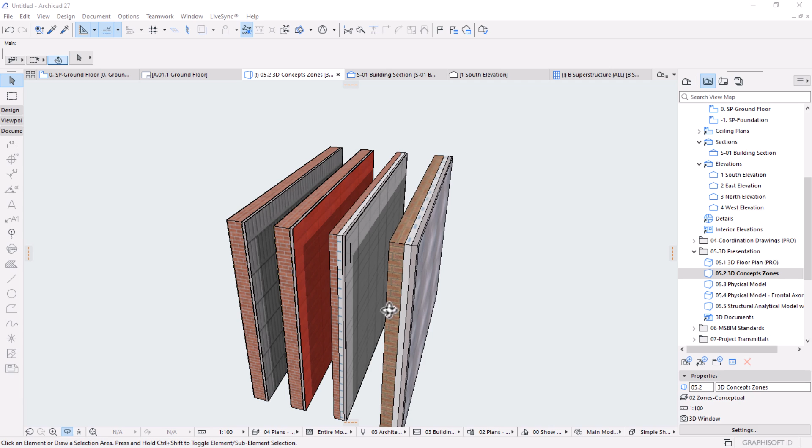Hello my friends, my name is Dominic, and in this video let's explore the philosophy of ArchiCAD and its methodologies. This will not only help us understand the inner workings of ArchiCAD but also uncover intricacies that we might have missed during our self-teaching efforts, propelling our designs to new heights.

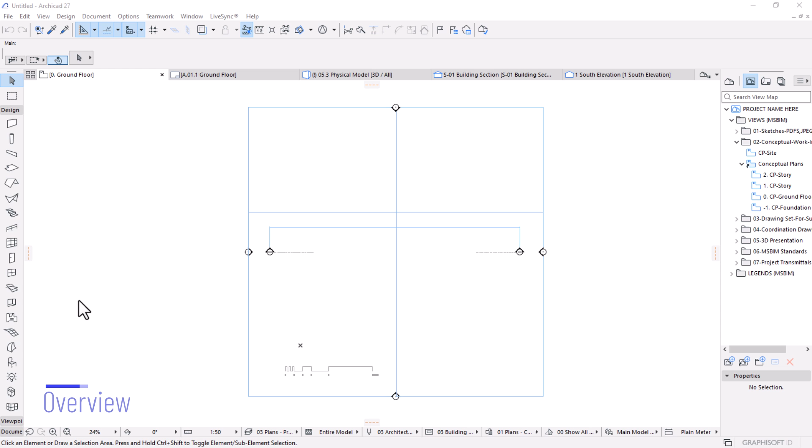My friends, to get started with this video, I want us to understand the BIM-centric approach of ArchiCAD. It means it's been built on a BIM platform. BIM means, I'm sure you know, building information modeling, which means it focuses on creating a digital or a visual representation of a building. And this comes in the form of physical and functional characteristics of a building.

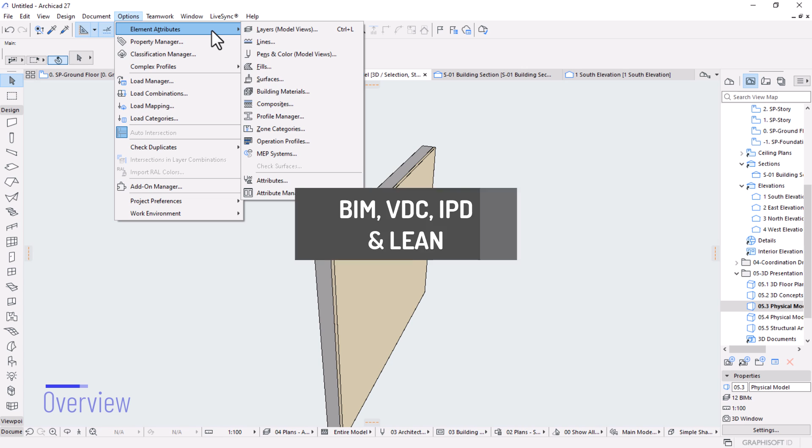So there are different methods or systems that ArchiCAD supports. Not only BIM, we have VDC, which is Virtual Design and Construction, IPD, Integrated Project Delivery, and also we have Lean as a system. We'll delve deep into this system on the webinar because we cannot cover them all in this video.

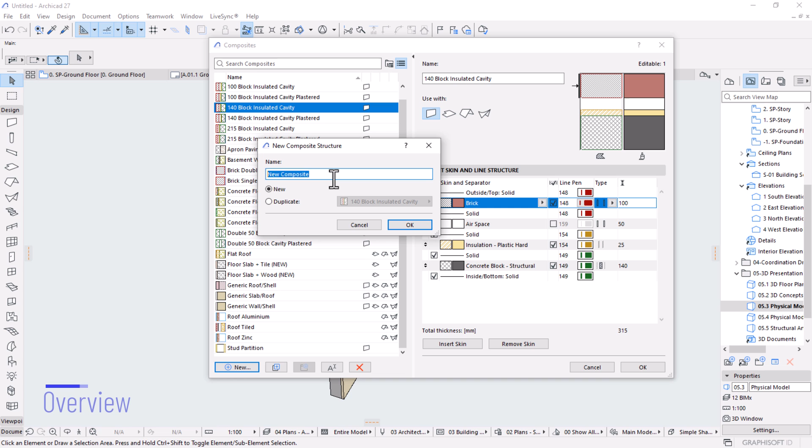But I want us to focus only on a specific aspect, which is the information side of it, because all the systems use information to better inform the project. So I want us to cover that aspect, the use of data and parameters to better inform our project.

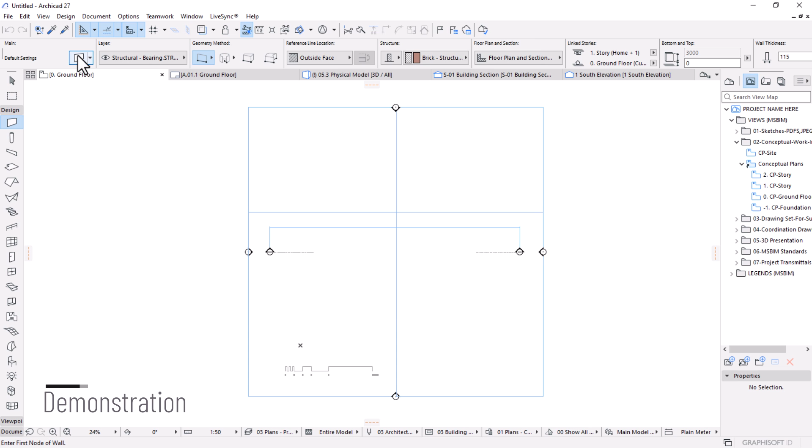So we have also the settings dialog where you can expand this and access more information in a broader perspective. So let me just stretch this so that we can fit all this information inside here, and then it's been divided into sections, right? We have the first section, which is geometry and positioning.

Obviously it determines the position of your wall, but it's determined by linking your element to the stories. For example, currently the home story, with the offset from 0, is linked to the ground floor, and you can also start it from the foundation floor depending on your design requirement. Okay, and then it's linked again at the top to the floor above.

That's why we have top link, which is story number 1, the upper floor from ground floor. Here it will calculate the height of the stories, the height between the two stories from ground to story 1, which is 3 meters. That also will determine the height of your wall, for example.

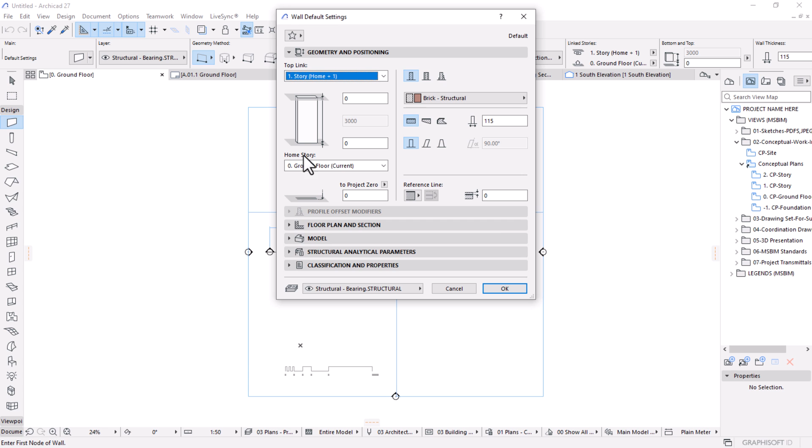But if you go back to your story settings and adjust the height of your stories, you can say Control 7 to access the story settings, or we have to cancel this first. You can say Control 7, or right click on one of the stories here on the view map, then go to story settings. Shortcut is Control plus 7 on your keyboard. If you're using Mac, it's Command instead of Control.

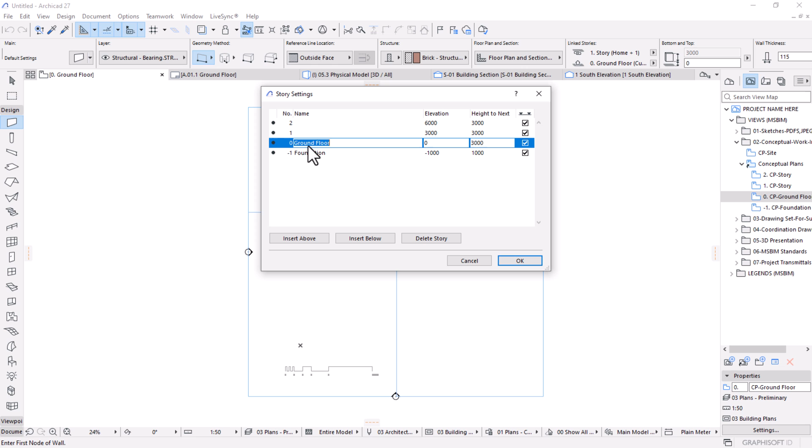So let's change the height of ground to story 1, maybe say 4 meters. If we change it and hit OK, and go back to the settings of this wall, you would see now the height of the wall is being changed, or it now addresses what's the height of the two floors, which is great. It's just basic information that can inform your project better.

And then we also have this part where we can use a basic or a composition of materials or a profile. But as you know, these walls are a composition of materials. Most of the elements in your virtual building will be a composition of materials. If it's concrete, you have to have a series of different materials that bind together that slab, for example. If it's a roof, you also have different materials that assemble the entire roof. So it's just like that in ArchiCAD.

But normally we can use just the basic for maybe conceptual work or sketches. But if you want your visual model to represent an actual building, you have to do things right. So our wall is going to be keyed on a composition, and then we're going to create a composition.

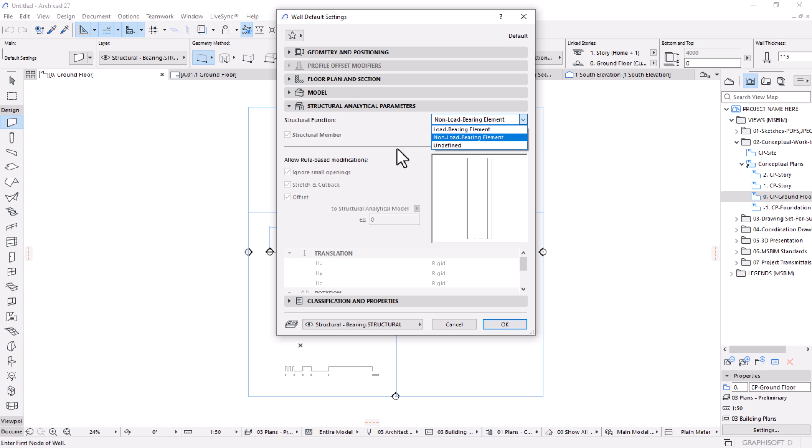We also have another important section, the structural analytical parameters, where you give meaning to this element. Is it non-load bearing or load bearing? The structural functionality of this. In this case, I would say it's a load bearing element. Then you can also check what exactly this element is - it's a wall. In terms of structural membership, there are three types: plate, wall, and shell, according to the ArchiCAD concept or philosophy.

So let's just key in wall, and you can see here we have 'allow rule-based modification.' So we want to check all the boxes to ignore some small openings and stretches and cutbacks. Okay, so down below is the translation of that information we just assigned there.

Another important section is classification and properties. If you click on it, you would see we have tons of data about the wall. Some of this information comes in as placeholders - it's just parameters for you to key in information, or you can even customize them.

But I want us to look at classification. Let's hover your mouse here and stretch this a little bit. Classification is very important because it's the system we use to tag or assign information and manage how that information is used for every element in ArchiCAD. Every element you place that becomes part of your virtual building has to have a class or classification system.

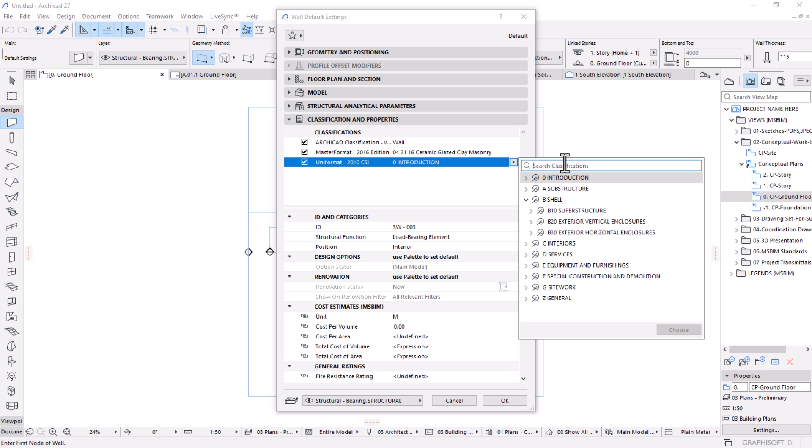What is it? What exactly is this in relation to the building components? I would say this is under shell superstructure. I'll just search here on the search bar, say a wall. It will give all the different types of walls: exterior wall construction, exterior wall supplementary components.

But what do I need to do here? Exterior wall - I think I will go for fabricated exterior wall assemblies, because what I'm trying to do here is come up with a different material composition, so I think it's the appropriate specification for that.

And then from here I would say... actually, let me just leave it the way it is. There's a lot of information that can end up confusing you, but you can just keep it simple and choose the exterior wall, just like that.

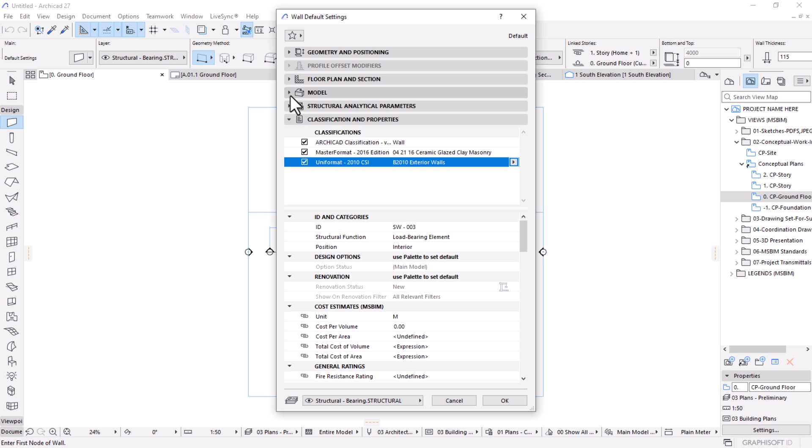And then we have the model parameters, which is the surfaces. I don't like to use this one because I'm overriding the materials that are supposed to be represented appropriately, so I'll just hit OK.

I'll come back to this one. I can just get rid of it for now and hit OK. So let's just place the wall here. I'll draw this wall to here - pick the first point, and then I can key in the length of the wall, say 5 meters.

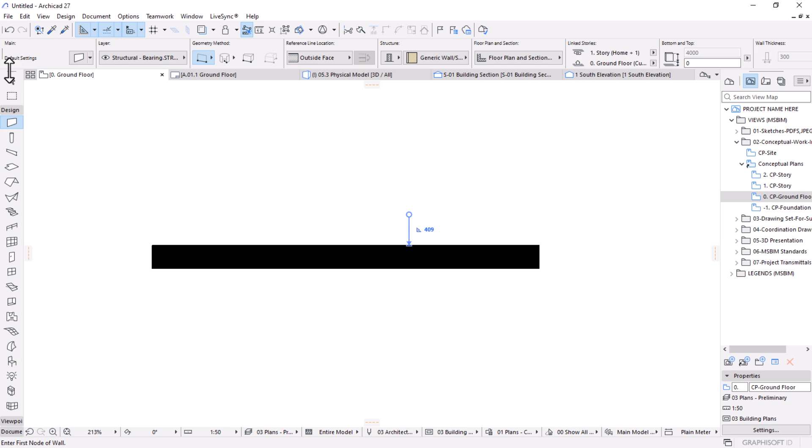Right, so I'm in a different view for conceptual plans - that's why my wall looks solid like this, but I want to expose this. You can get rid of the graphic override combination, or choose a different, appropriate view for this. Perfect, we have that. We can come here and say no override, but it's basically the same thing.

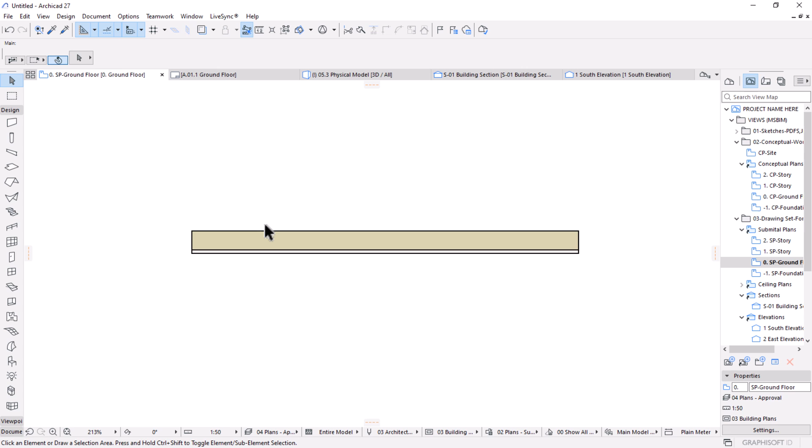So we have this kind of wall - it has two skins or two layers of materials. We have this gray one, and then this one. So let's see how we can leverage this section and create a series of materials to assemble our element, which is a wall.

The first thing to do is load - I have a library I want to load for the materials or surfaces I'm going to use, because ArchiCAD does not offer everything. Some of the information has to come from suppliers, because these materials come from someone else, isn't it? Someone has to manufacture this information, these materials. You as an architect or designer choose from the suppliers or manufacturers, so most of the time we're depending on the information they provide about the product or material.

So let's go to File, then Libraries and Objects, Library Manager. I'm going to load my custom surfaces that I've downloaded from the internet. So I'm going to just load - but before you do that, I'll cancel this. Before we do that, let me introduce you to one of the sites here.

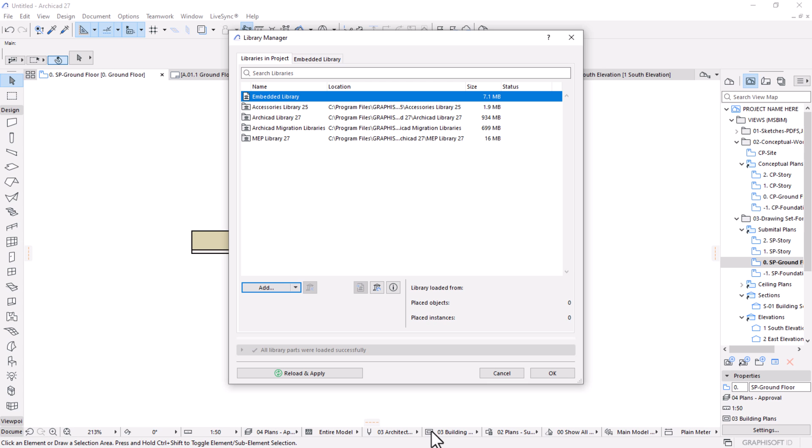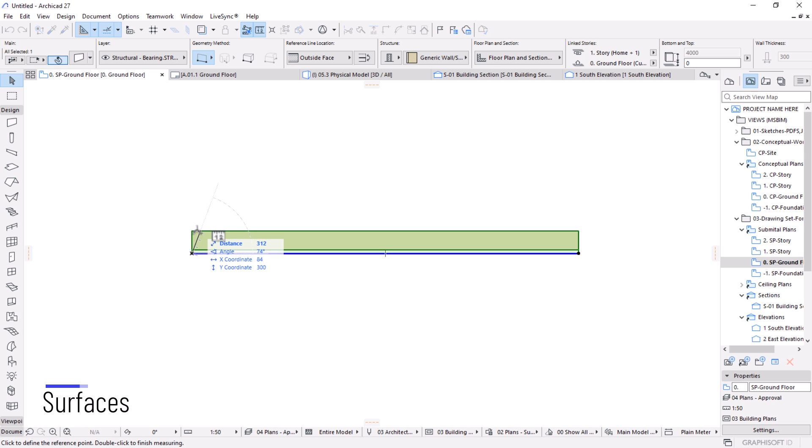So for example, we can calculate the number of bricks for our wall we just placed here, which is this wall. Let me cancel. So I know the length is 5 meters, and the width is 3 meters, the thickness is 3 meters. If you go back there and key in that information, the length is 5, the height is 3 meters.

Okay, let's go back. I've downloaded one of these materials that we're going to use in our demonstration. Let's go back again to File, Libraries and Objects, Library Manager, to load our library that I just downloaded from the internet. So it's going to be in downloads.

This is the library, I'll open it, and then perfect, it's here, it's loaded, and I can just say OK to embed it, or link it, into my ArchiCAD.

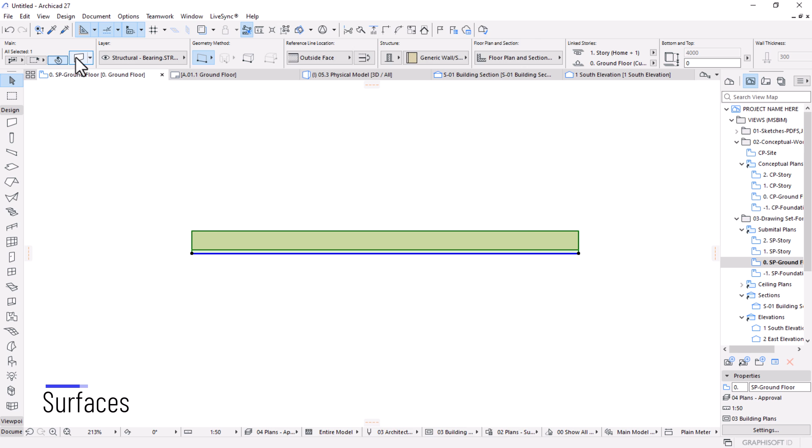So it will take a bit to load, and from here let's see where the library has been assembled. If you come here and open... no, not this. What you want is to access that information and see how we can use it on this wall. For example, if I go to F5 and put this wall in 3D.

This is just, there's no representation whatsoever of a physical or actual element, right? What we said, these methodologies and systems, which is BIM, VDC, IPD to Lean, represent the actual physical and functional properties of an actual element within your virtual model.

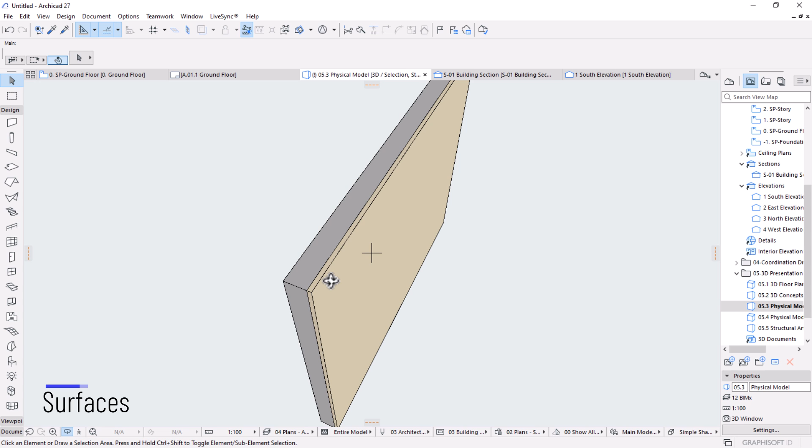So let's see how we can make this, sorry about that. Okay, so the first thing to do is to look at different aspects that assemble the information within your element.

I'm going to start with the surface. We're going to look at surfaces, building materials, and composites, and see how this works hand in hand. That's how ArchiCAD functions - they use these element attributes. They are called element attributes because they are the ones that glue everything together.

Your physical and graphical representation of your element is based on these attributes - your fills, surfaces, building materials, and composite. You come here under composite and it glues everything together, from your lines, your pens, we bring everything together by using a composite. We'll see that in a minute.

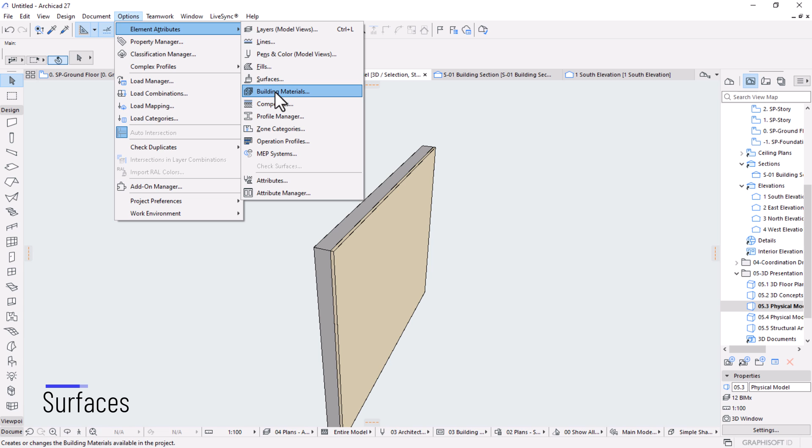So let's start by creating a surface first for our walls. I'll go to surfaces, because we need to create a material. In order for you to have a material in ArchiCAD, you have to create surfaces first. By default we have this in our template - you can see it's nicely arranged and formatted well. What you need to do is go down below here and say, new.

Let's say new, and because I'm going to create a series of materials here, I want them to be in the same section, so I'd better use a code that I'd know is for this. Let's just say ACM, or say BIM, for example - I'd say BIM, then hit OK. I'd like to give it a name according to the texture name, so for now I'll just hit OK as running bond, that one, which is this material.

We can come later and readjust that information. So let's go back down here under texture, and then we replace this texture by clicking on this button for browse image, and that's where our library comes in. So if you scroll up, you'd see there are linked libraries here. So we have our ACM textures there. Let's open that and then find our brick that we got from our manufacturer, and then hit OK.

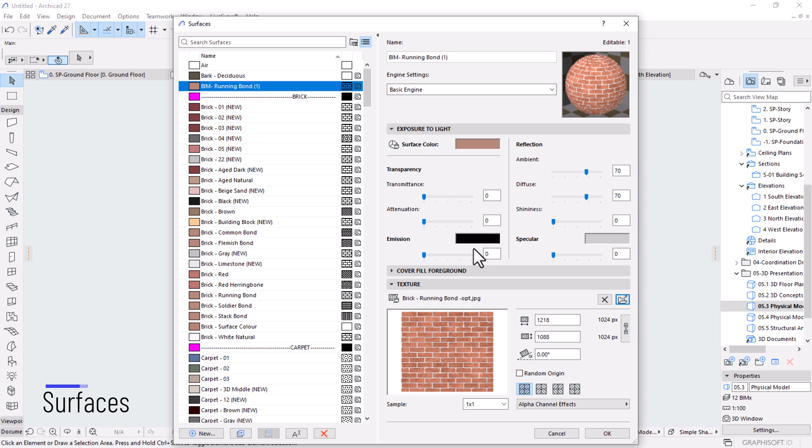All right, I would like to link original proportion, okay, so that we can have it nicely like that. I think we can leave it at this measurement. Okay, now I can come back because it says Sapphire Satin. That's the name of the brick. I'll say Sapphire Satin. Right, this will be face brick. Okay, and then the surface color should be relatively close to what we see here.

All right, once we're done, let's create another material again, and then say BIM. This one also, just hit OK. We're duplicating it because we want to reuse the same system, which is BIM. I want to group them here so that I don't have issues of navigating when I'm trying to assign it. So this one also I'll just do that.

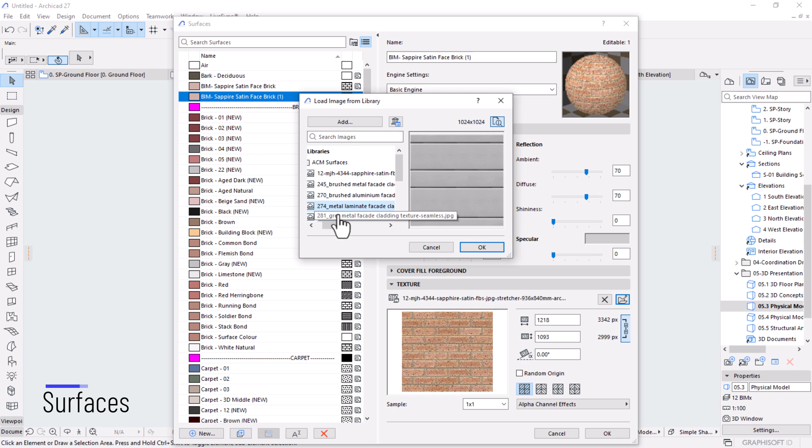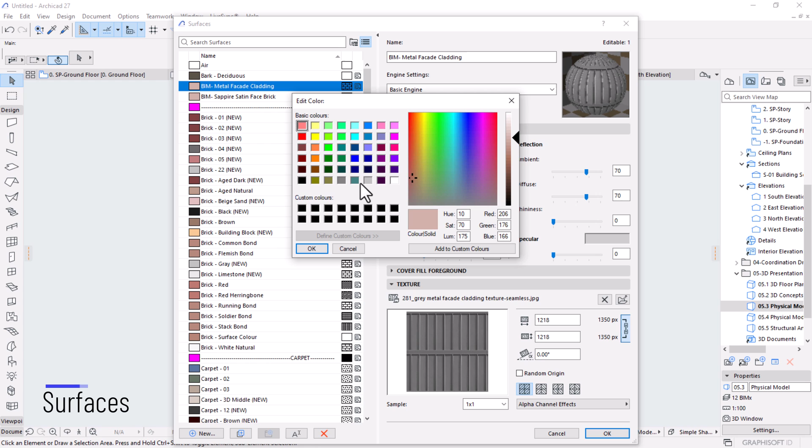For this I have different types of aluminum panels here. I'll start with this one and then take the name, rename it there. This is called gray metal facade cladding. I'll just say metal facade cladding. Then I'll link the proportion as well, and then set the color to resemble what we see, or the texture, which is that. Okay, let's go back again under new and create another material.

So let's go back here, browse. I'm going to go for this one. Hit OK. Make sure you link the proportion right. Then the name is metal industrial cladding. Let's just say industrial cladding. Yes, we have the fourth material that we need to create as well.

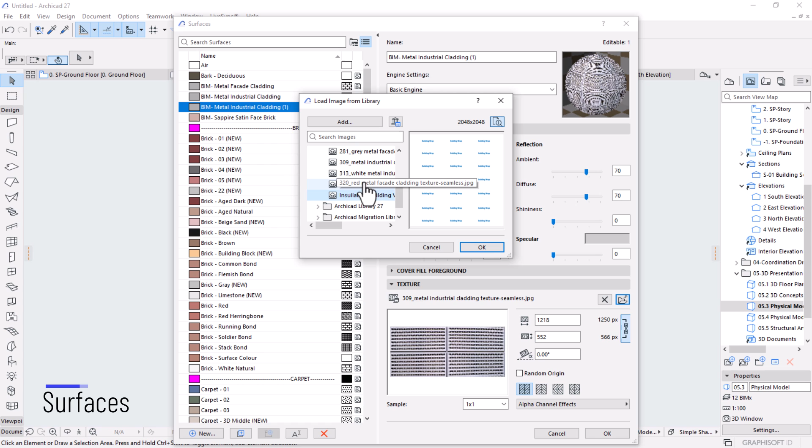Browse. This one I'm looking for. What is this? I'm looking for the insulation, but we'll come and create an insulation material after. Let's go with this one. Its name is the red metal facade. I'll just say red metal facade because it says the name already exists.

Okay, and then we have an insulation material, because these materials, if you join them together, you're gonna have to have a form of insulation within your element. So I'll create a texture for the insulation as well. Browse, I have it somewhere there, which is this one. The name is insulation building wrap. Insulation building wrap. Okay, I think everything is fine.

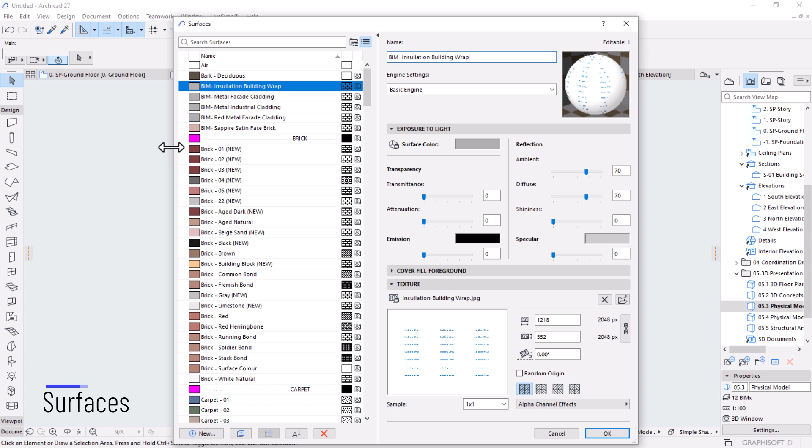I think I forgot to change the colors for this one. It's supposed to be orange like that. Okay, for this one it's fine. Industrial, maybe we can reduce the intensity a little bit. For cladding it's gray, that one is fine. For this, let's make it white. Make it white. Okay, so now we have the color of the material, its class, whatever, and then the name of the material.

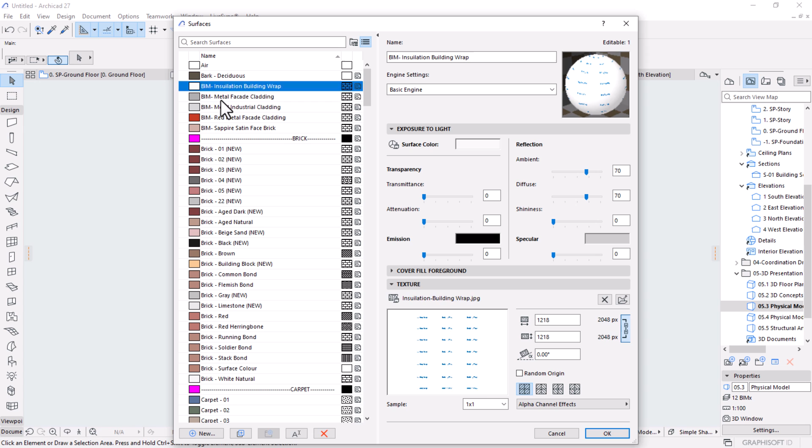Okay, so also make sure this is locked. All the materials have to be locked. Even this one, lock. Yes, I'm pretty happy now with all of these materials that we created. Let's see how we can bring this material together now. I'll hit OK, and then we'll go back again under element attributes from options menu, and then we want to open the building material section. So here again we're going to create a material now.

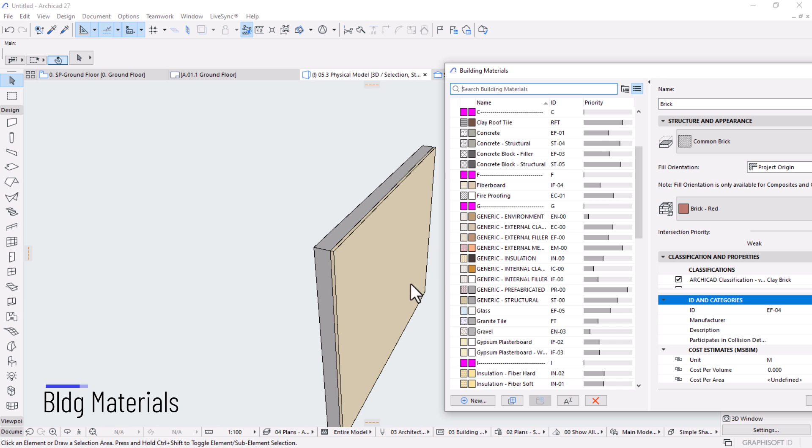So remember, these two layers represent what's in this list. I don't know, am I making sense? We have two skins here, or two layers of material. We have this more like a plaster, and then we have the core, which is the core brick or core wall, which is this gray thing. These are the only two materials used for this element. They were extracted from here, or they were created based on here.

So to see where these materials are located, let's just cancel, and then if you select it, you go to options, element attributes, and then open again building materials. You'd see where the materials are located, because ArchiCAD will highlight those materials. We have this generic structural material, which is this gray, and then we can find another material. Where is it? Yeah, I think it's this one, generic cladding. Yes, it's the one. You can see the color as well.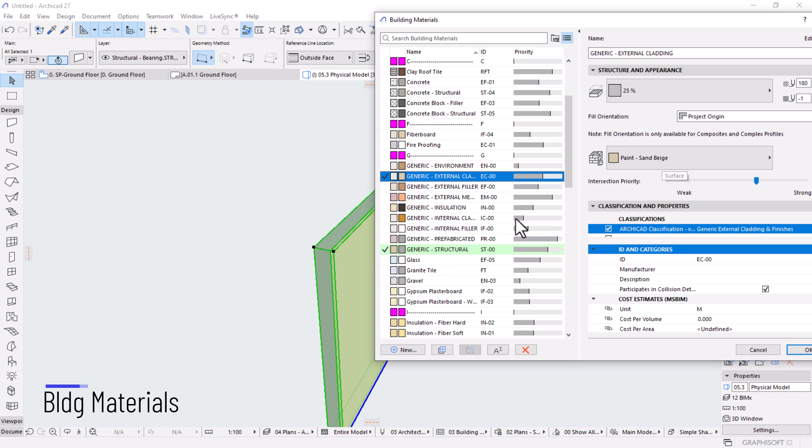So that's basically that. So we need to bring our materials here for the surfaces we created. Remember, let's say new to create one, and then I'm gonna also group them here by the abbreviation of BIM, and then the material will be, we're gonna start with the bricks. Okay, I forgot the name of that brick.

Okay, I said sapphire satin. Oh, sorry about that, I didn't see. Sapphire double P, sapphire satin. So even naming of the material, guys, really counts, because that is the information that you can also extract and share. It's very important to see how you name your materials.

What's this? Sapphire brick. Let's say, I'll just say clay brick. Okay, and then hit okay. That's the material we just created. Well, we'll have to define the structure and appearance, and then we have classifications here down below. Then we have properties of this material.

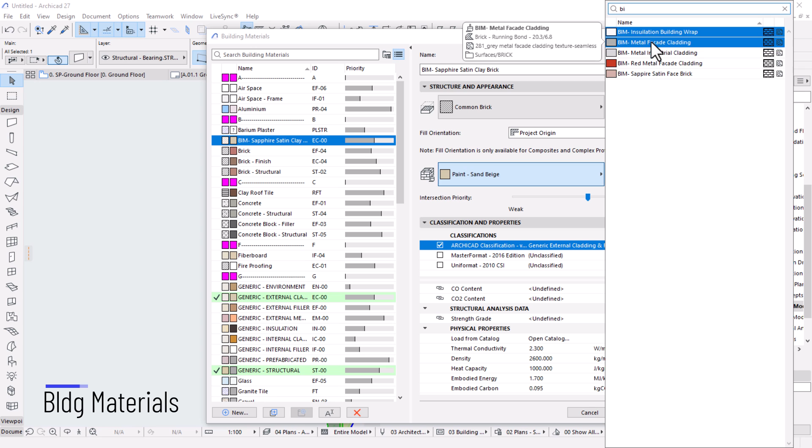And then I also need to define the color of the hatch, which is going to be 13101, right? That will be the color of this hatch. Okay, so the strength, I can reference the strength of this material because it's important, because ArchiCAD uses what you call intersection priority to connect the elements. So when a wall meets a wall, there has to be a smooth connection.

And when, for example, a load bearing wall meets a partition wall, a dry wall, it has to be communicated very well. So that communication comes from how weak or strong the material is. Okay, so for example, I need to benchmark on this brick and see its strength is 540. So I think mine also around 600 is fine.

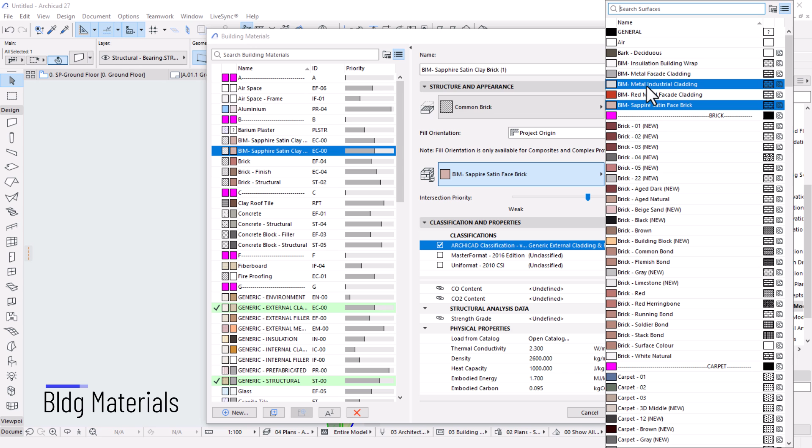Okay, so from here I can create another material as well. For now I don't know the exact name. So what I do, I can come here and then bring the name first, which is the red metal, and rename it the red metal facade. Yeah, this is a red metal facade cladding.

And then because this is a different material, it's not a wall, it's a metal, right? So what I need to do is to change the hatch to represent metal. If we have metal, I think we have aluminum, right? There we go, as a fill, and then the surface is fine like that.

Go back again, and let's create another material as well, which is going to be industrial cladding. I'm just gonna say industrial cladding, then get rid of this one, and then that. So also this is another material, which is for metal, but I need to confirm the strength of metal. Let's just find a metal, we have aluminum. I think 311 is

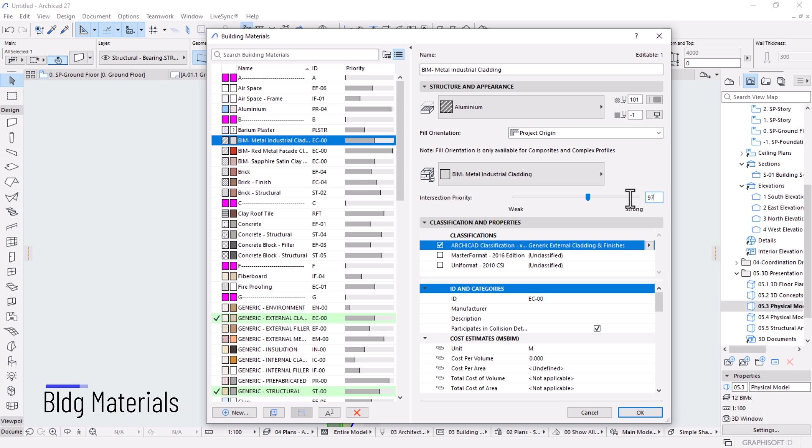Let's create another one because we have a couple of materials there. Let's load metal facade, then give it a name, facade. Get rid of one. It's the same cut fill. Then I can go back, create another material, which is the last one, the insulation. Insulation building wrap.

All right. Okay, for the insulation, let's also confirm the strength, 410. They're basically 410. So I'm gonna just do the same for my insulation material. Okay, so we have all our materials created here.

So we need to go back. Let's hit OK to complete that, and then from here, if you go again to Element Attributes from your Options, and then open now Composites. Let's see how we bring all those materials together now into an element.

Okay, let's say composite. Then from here, what we need to understand is that we have a list of composites. This is an already available composition of materials that comes with ArchiCAD, and you can see all these are specific to the tool they're going to be used with. You have your wall element, slab element, roof element, and shell element. So what we are going to do here is create a composition of these materials for a wall element. That's what you should bear in mind.

Okay, so I'm going to say new here to create, and you see each and every composition here has a different list of materials assigned or arranged in an order based on how it's going to affect or impact the construction of the element. So I'll hit on new, then I can duplicate this to take advantage of the existing listing, or just create new completely. I'll say new composite.

We're gonna start with one of the metal facade claddings. Okay, so I'm gonna use the BIM prefix, for the sake of you guys understanding and referencing across all the attributes how we've been creating this. So I'll say BIM, and then this is going to be the naming. Like I said, it's very important.

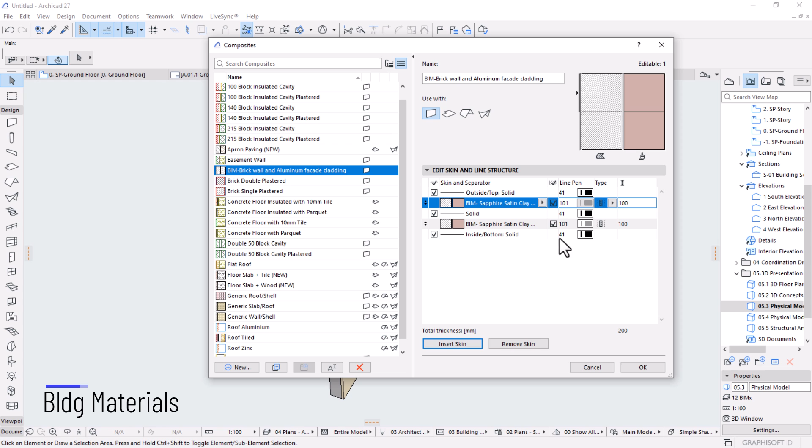Right, then we're going to insert another skin, another material. Let's insert. This one is going to be our insulation. Where is our insulation? Building wrap. And then also set the pens. For the insulation, I'm going to go with 0.13, and the hatch should be 101. I think the hatch is fine at this.

And then we also have the thicknesses of these materials. According to the specification of my supplier, 106 is the thickness of one brick. So if you make it 2, it's going to be around 250. Let's make it 250 to accommodate plaster, or just say 220. Okay. You see now it changes the preview here. And the wrap, that insulation, let's make it 80.

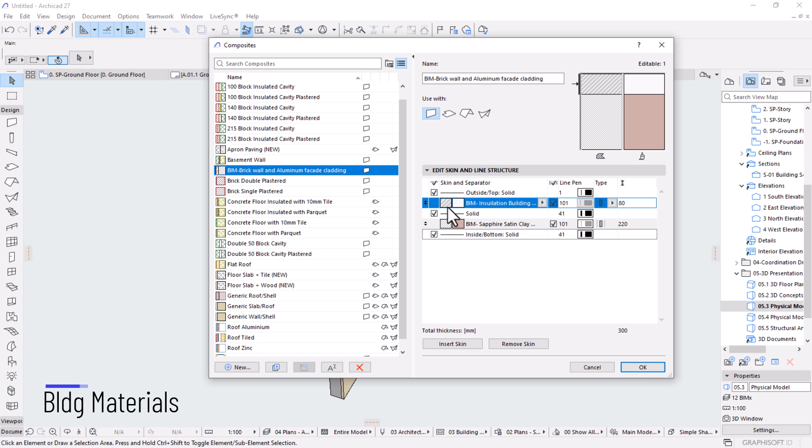We forgot to change the material of the insulation. As you can see here, it's still under the metal. So let's quickly say OK, go back to our building materials, and change the insulation surface to something like this, but insulation. Okay, we have different types of insulation fills.

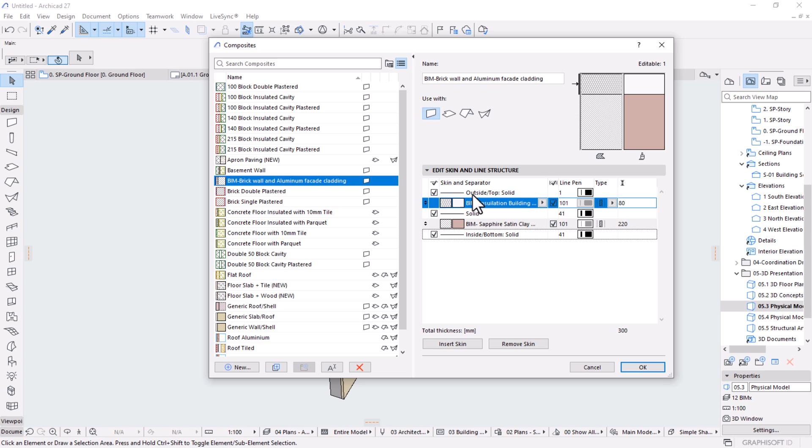All right, which one should I use? Okay, let me just go with that, and then hit OK. If you go back to the composites, you'd see it's updated. Perfect. So from here we need to add another layer of the cladding. But before you clad, depending on the case, you want to apply the cladding fixtures.

Normally it comes as T's, and they call them T's, where you bolt or screw your aluminum composite, whatever metal plate or panel, into that structure. So we need to add that layer first. So I'm going to insert it above this insulation material. To do so, you need to select it so that it can be inserted above.

So let's say insert skin, as you can see, and then I'm going to change this to be just aluminum, because they use aluminum for that. 80 is fine as well. I think let's make this maybe 100. I don't know how thick insulation materials can become, but you'd want to use appropriate, accurate data here. For the sake of this demonstration, bear with me.

So aluminum, yes, I think it comes around 80 by 40 with the profile of one member. So I will use that. I'll select this also and then insert another skin above for our cladding. So this time around, which one should we use? We should start with a facade. Let's go for this one. Okay.

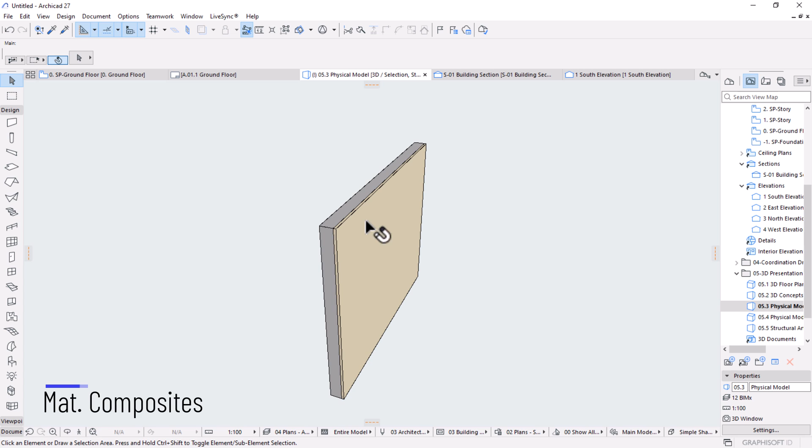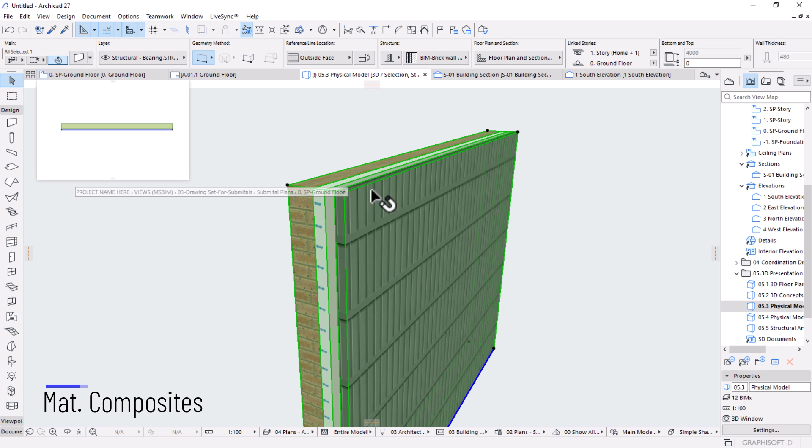Let's hit OK, and then to assign that composition to our element, we have to select this and go under structure, then change it by selecting from the list there. It will change to that. Okay, that's basically what I wanted. I don't think this is the material that I wanted for the cladding. Let's select this, right click, and say edit selected composite. What we want is to change this to industrial cladding.

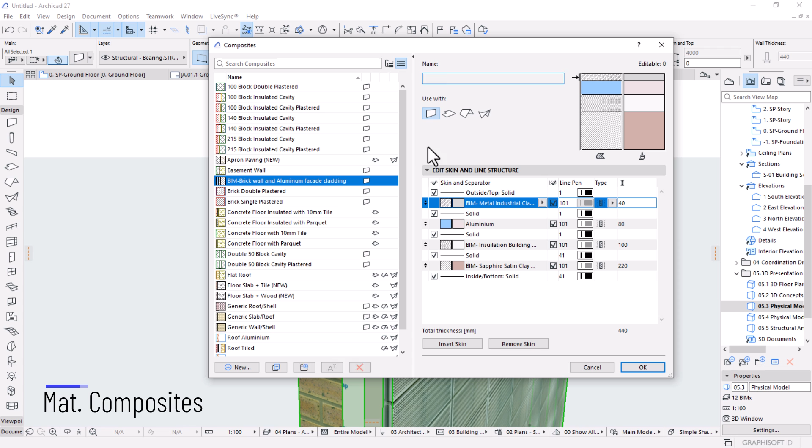Perfect. We also didn't change the thickness of this, because it has to be less than 50. Normally these panels come as, for now, 40. Let's go back, right click again to edit, and make it 20. Something like that. I wanted that so that you can see the edge here wrapping around. That's the nice thing about using this methodology.

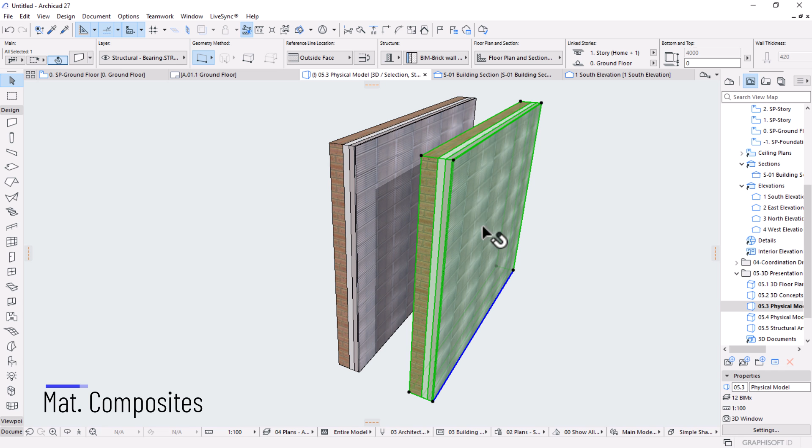Okay, so once you are done, there will be issues of representation. If I had to remove these ones, let me just make a copy. I just want to show you some of the interesting stuff there. I'll make a copy of this, right click, then edit. Let's duplicate that one, call it one, for example, and then remove this, just to remain with this insulation.

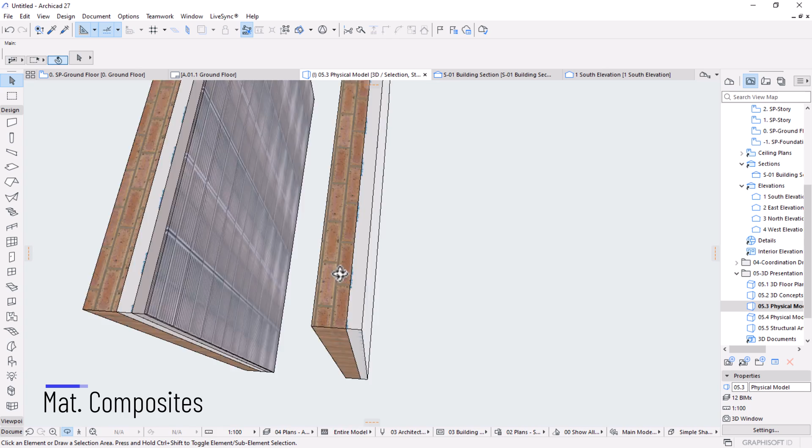Change this to this one. I created this texture to represent this material. It's so important because you really want to represent elements the way they are, and I think the hatch looks huge, right? It looks huge. Okay, that's basically what I wanted to share with you in terms of that.

But if you feel the panel dimensions are small, what you can do is go back and select the element, because of how attributes work: if you select the element and then go to the window of that particular attribute.

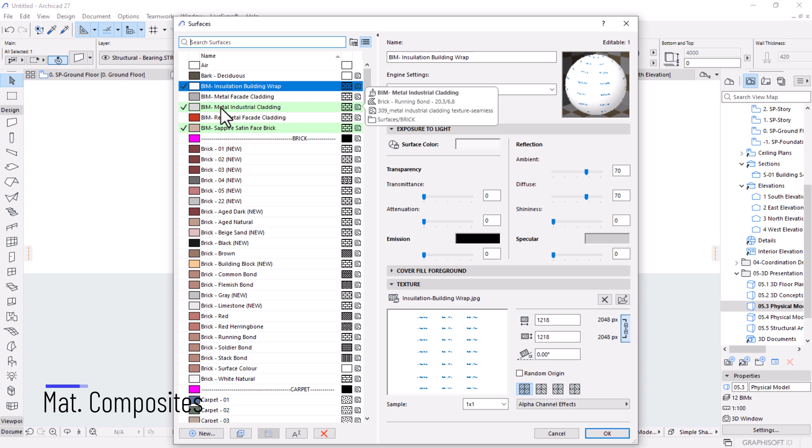For example, in this case we want surfaces. With the recent version, ArchiCAD will select or highlight those materials that the element has been selected in your file. So right now I have 3 materials, and I want to change the size of this. Let's increase the size to maybe 2 meters. Let's see. Boom. See, now it has changed. Okay, so now we have a true representation for this.

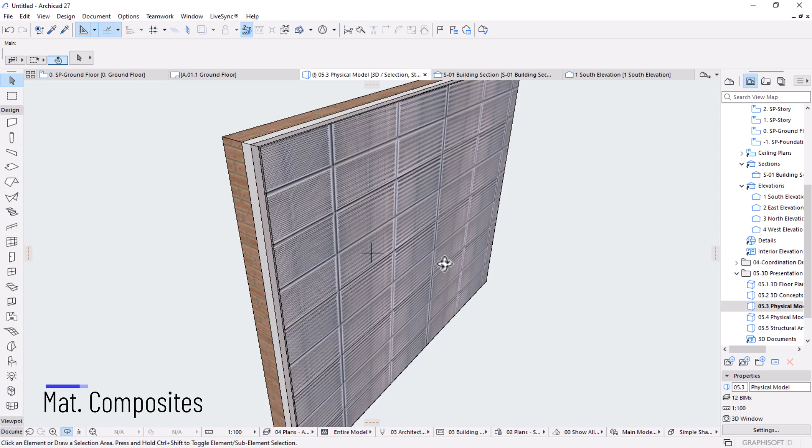Okay, so now it's important to understand how this information can be leveraged. The information that we've been talking about, we covered a bit, classifications and properties, we covered the surfaces, we covered the creation of the actual building materials, and then we covered how do we bring the materials together now into one thing, right? So from here, what I want us to check is the leveraging of that data and see how we can really take this into the next level.

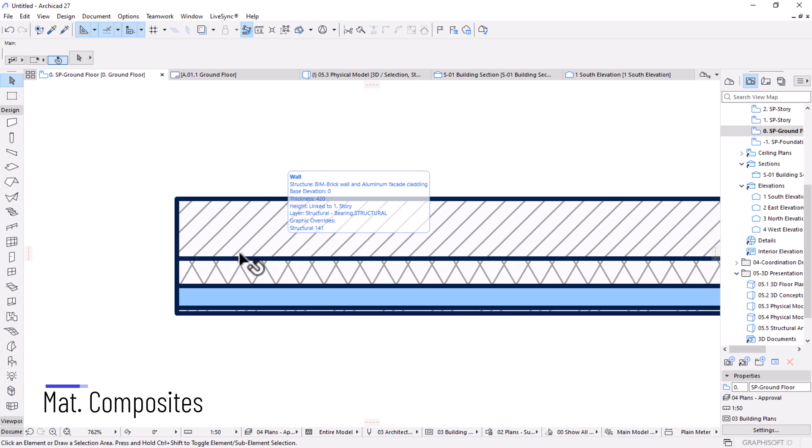Okay, so if we go back to the ground floor, you start to see the composition of these materials. Okay, so we have these different lines. I don't think it's well represented graphically. Sorry about that. So if you go to view and then on-screen view options to uncheck true line weights, that's where you can see or judge your element. But let's select it and then go back to our composition and then try to fix that first. So for this one, we are going for this.

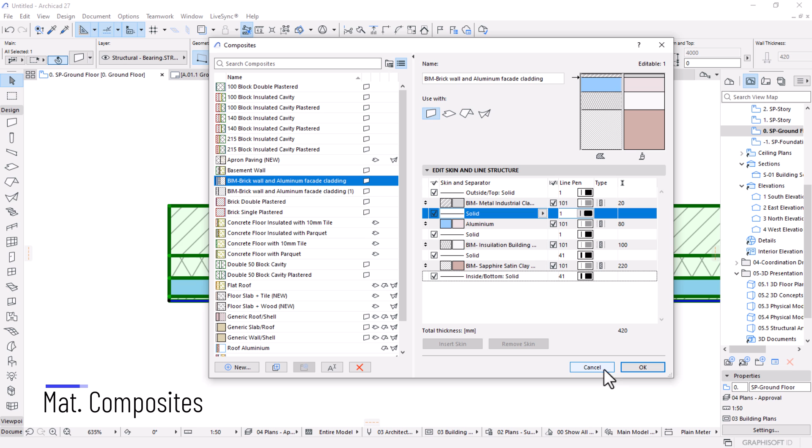Okay, this is 41 1. Yeah, all these are on 1. Okay, I think they're pretty good. I'm happy with the pen sets. I can also create a custom pen set for this if I want, but for the sake of time, let's just leave it there.

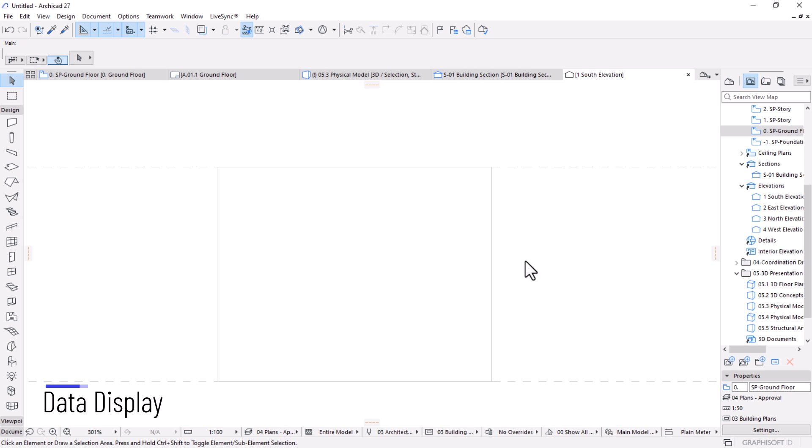Okay, so now I want us to see different ways of extracting this information in your drawing. So I'll start with the one on elevation. So if you have to open this elevation from the panel side, from the cladding side, which is going to be this elevation, right click, then hit open with current settings. This is the element, right? So I'm going to uncheck the overrides, for example, but it hasn't been cut.

So yeah, I need to maybe bring it right here because the extent of this ends here, so it has to be inside that region, so that if you go back it becomes solid like that. So the south elevation, if you go here under the view settings and find that elevation, which is the south elevation, if you right click on it and then go down under elevation settings, we can say we want to see the true representation of that material here on elevations, right? So let's go for the model appearance section.

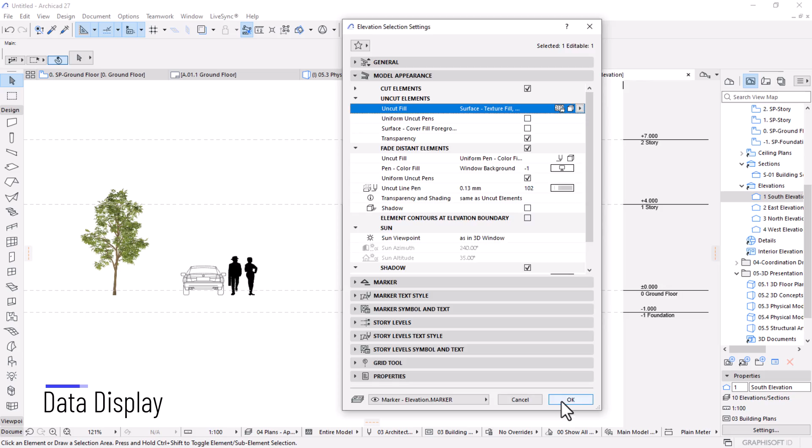How do you extend this? You cannot. Okay, it's fine. Okay, I can just stretch it down below. So I want to impact the uncut elements, the elements that I see, which is the section. So I'm going to say I want to show the surface texture fill, right? And then yeah, I think that's one thing that I need to do so that it can show the actual material. Perfect. We'll come back to this elevation again to do that. Let's go back to our plan view.

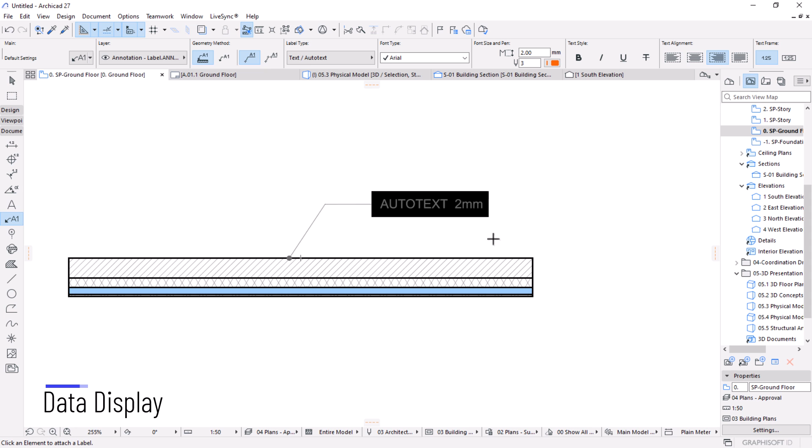So I want to place a label here, so I would go to the documents section and then activate the label tool. For this template we have different types of labels. Let's just check in the list there. We have a leader. Yeah, you can pick one of this, and then click this. So you see, labels are very important because it's how information is being leveraged. Yeah, we have what you call auto text.

So if I click on this, highlight this, and then double click on the text, for example, I can delete this auto text and then go here and insert auto text. Okay, if we insert auto text, we can find a way of labeling this. To start with, I can come here and create a different specification for that. Let's say we want the class. We can start with the wall and then see under the wall section what can we extract.

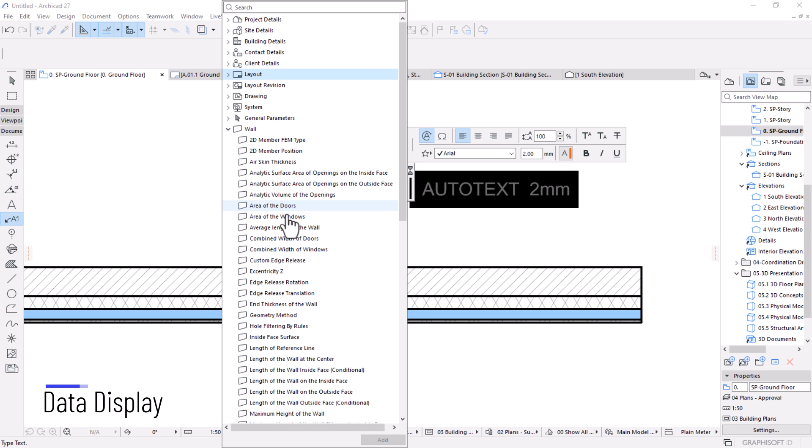Okay, so you have all this information. These are the parameters of the walls that we can use. Area of doors, area of windows, stuff like that. But I want us to focus on the classification and properties. Let's add this one, and then I'll add all of this.

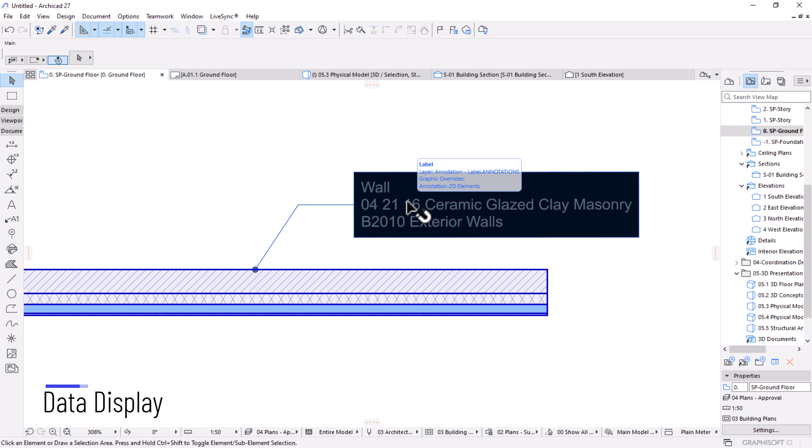Let's do that, something like that. Okay, we have this in a linear way, but I want to differentiate it by entering for walls, and this one is supposed to end here. This is just by pulling data using classifications that we've assigned, as you can see.

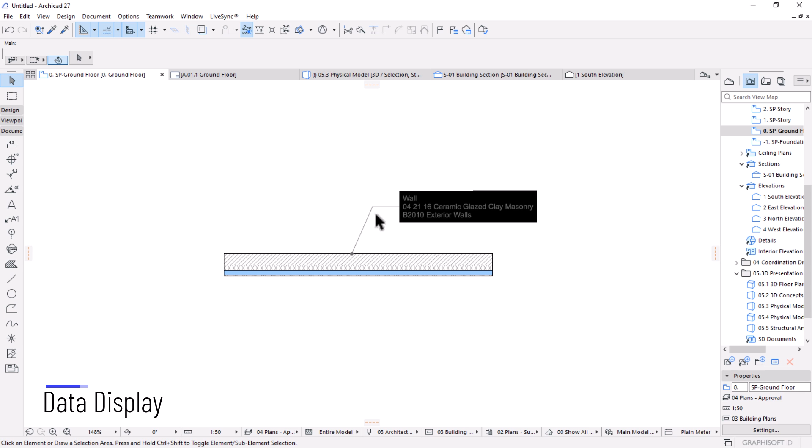So the information that is lacking here is the cladding part of it, the fabricated part of it. It just talks about the core brick, which is the masonry. You see, it will confuse other people.

So how do you extract this accurately? You can introduce a different approach, let's say I'm going to go back to wall settings. Instead of, under master format it says this is ceramic glazed clay masonry, let's find a better way, maybe a fabricated, because it involves fabrication. So if you say, let's just type wall, and then we can see we have metal composite material wall panels, this information.

Yeah, this information you can pick from here. And then the problem with that, if you say metal composite material wall panels, it will be represented there. But I wanted to show you the best way of doing it.

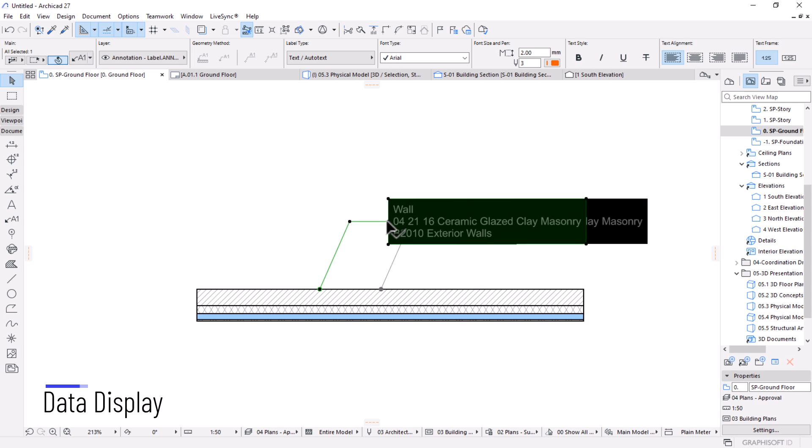I'm going to change the label. Let's pick this label settings, and you can just say Control Shift D and drag this label there, make a copy, and then I can put it somewhere there. Maybe I can align it from there.

And then I'm going to change the type of label that I've been using. So let's go for a different label, or still with the same label. We can double click on it, and let's delete everything. Okay, I can, because it's a wall, I'll just leave it as a wall there.

And then let's find another auto text, which is going to be, is it under general parameters? I can just search composites. Yeah, general parameters, building material, composites, stuff like that, or composite structure. It will depend. Let's add this one and see.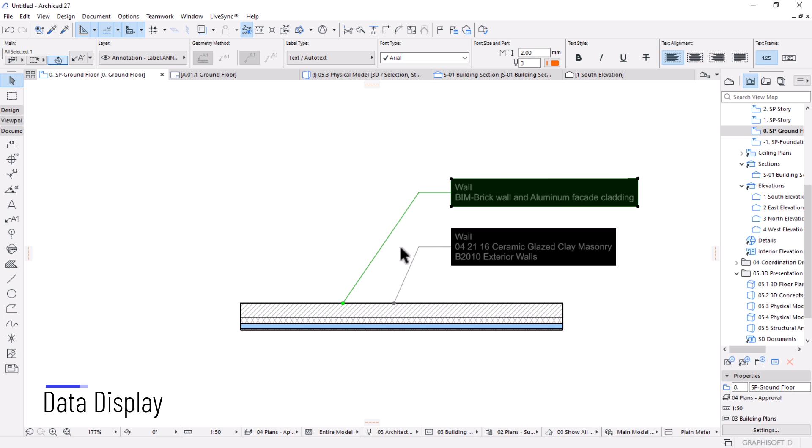You see, it gives us the name for the composite, right? That's why I was saying you better be careful in naming your elements, because your materials and your composites, your attributes are very important, because they're the ones that define also the specifications. Let's make another copy for this and try a different spec, and just align it there. I think this one needs to be dropped somewhere there.

Okay, so this time around, let's find, we have building material. Let's check building material. I think composite structure is still the same. Building all materials. Perfect. So we have all the materials now.

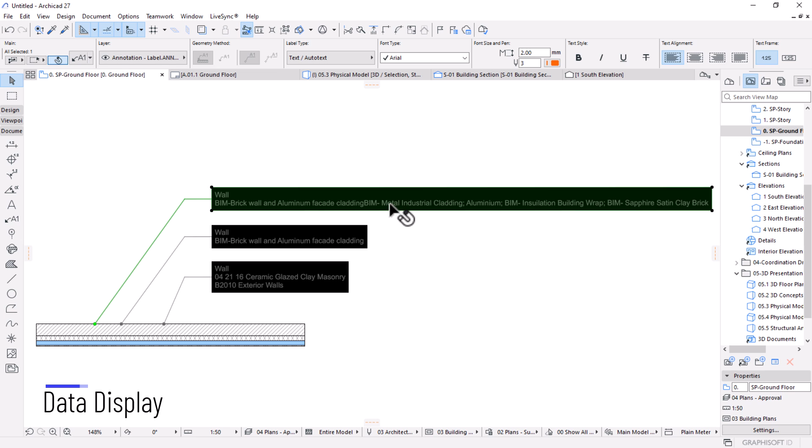I can say let's get rid of, no, not get rid of, we can... yes, we have a description there, which is the composite name, and then we have, which is this name, composite name, and then we have the list of all the materials that assemble this element.

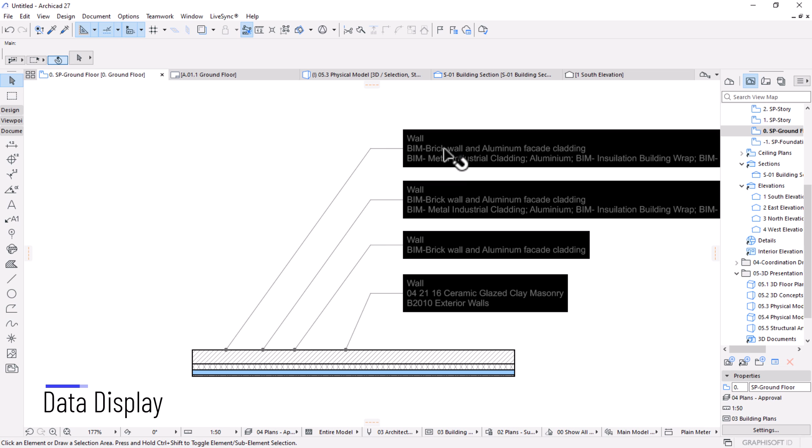And then we have another one. Let's make a copy, Control Shift D to make a copy there. I can stretch this, even if I make a copy, because it's the same element. So if you want to see the relationship between the element and the label, you can just hover on your label like this to highlight your element.

So I'm not losing that live connection or the connectivity, even if I duplicate, because I'm duplicating within the same element. So with this one, I'm going to change the type of label under the settings of this label. Let's just drag that. You have different types of labels here in ArchiCAD. This comes as a default in ArchiCAD. So what I want is the list, the skin list, which is this skin list label, and then hit OK.

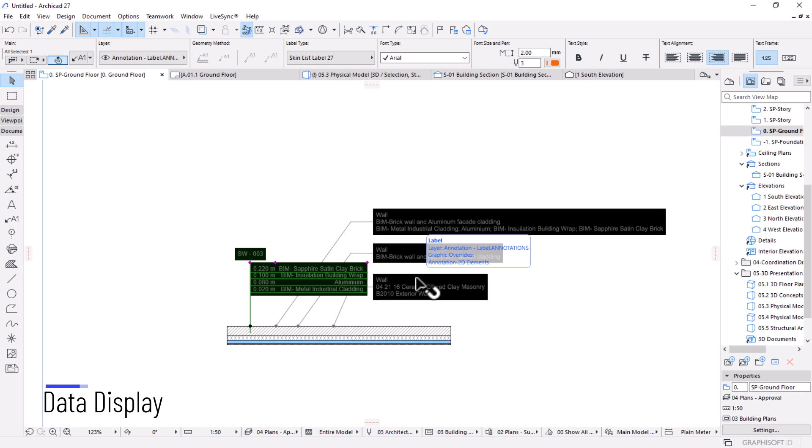Because it also gives us the opportunity to list all the material like this one, but in a different way. This we can assign with the sizes of each skin, which is cool. But by default it comes with this type of leader. So let's go back on the settings.

What I want to do here is, let's say under pointer, I want to activate the pointer. Then what else can I do again? If you say okay, yes, perfect, now it's the same with that. But I want it to be aligned, or the justification should be on the left. So I can come here under text alignment and make sure it's on this side.

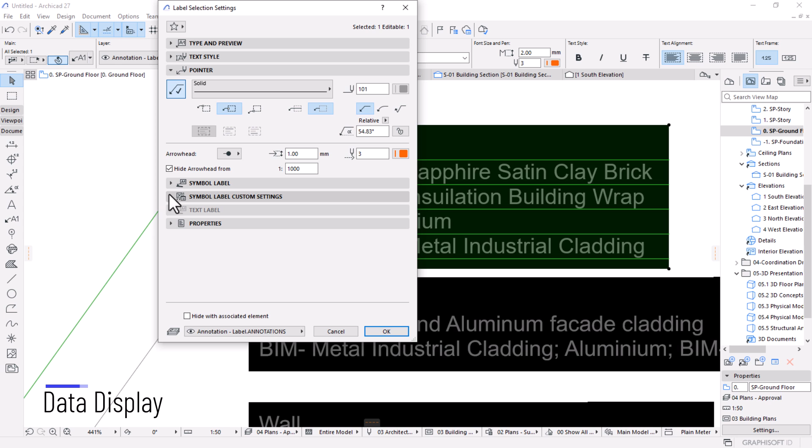One thing, let's explore what else we can expose here. Let's go back and collapse this one. I want to go to the symbol label custom settings, where we have some parameters to define.

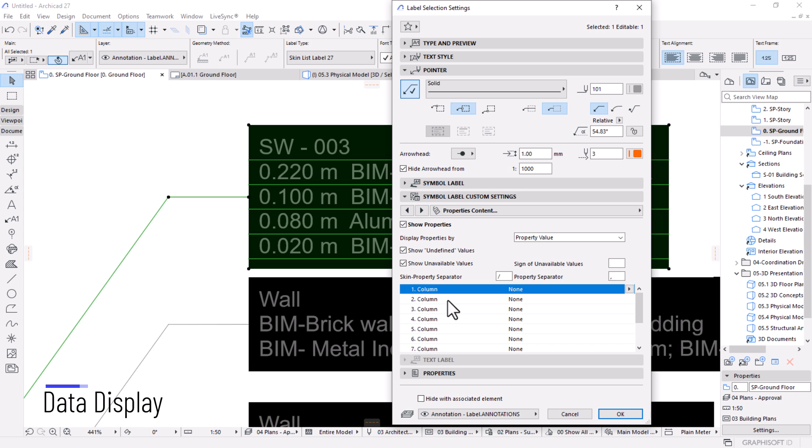We can show the header text, we can show the thicknesses if we want, we can show also the units and the thickness of that. Another thing we can check is on the next page, the show properties, where we can also create properties and values. It's a very good tool in ArchiCAD. And then I can get rid of the separator lines.

What else can we do again? Yeah, I think that's basically what I wanted to share with you. There is another option: instead of showing thicknesses as dimensions, we can show it as percentage. If you hit OK, it will show percentage wise in terms of the whole element.

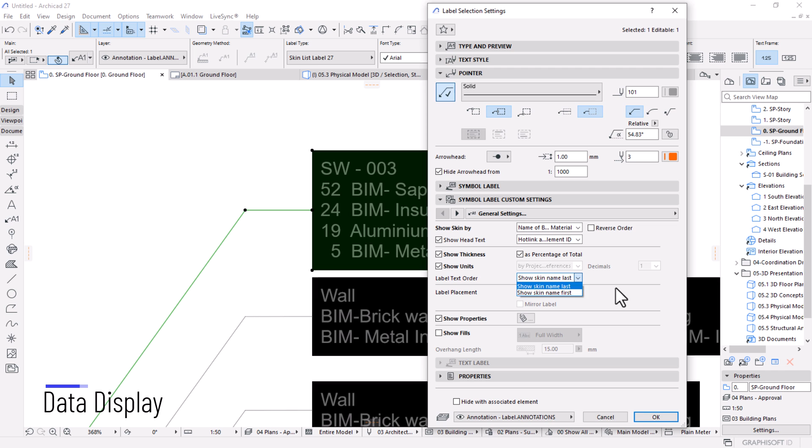I think you should put also the units for percentage. I don't know why I didn't put it. It should show, I don't know why it's not showing. Okay, but that was not a big problem.

52 means it takes 52% of the entire thickness of the wall, which makes sense because that's the core, the clay brick, the core material. Then we have insulation that takes 24%. 19 is the aluminum, which is our fixing plate. Then we have the actual panel for the cladding. Okay, so that's basically how you can do this.

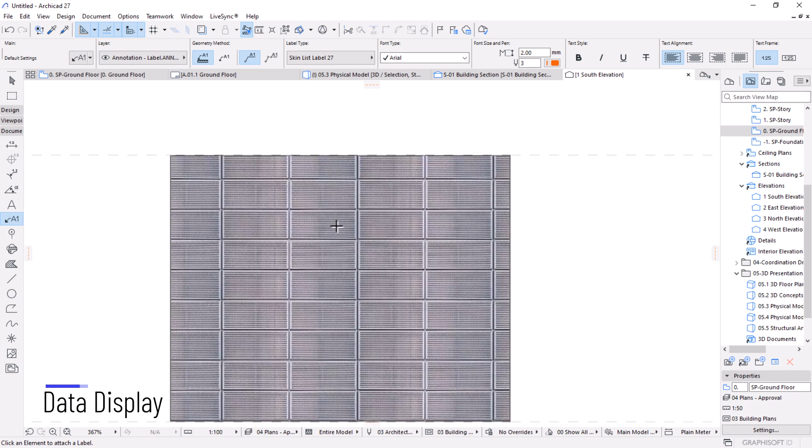If you go back to the section, or go back to the elevation, this information can also be captured easily there, as you can see. Then maybe I can change the size of it to 1, stuff like that. This I would want it to be straight.

Okay, so this information can also be accessed through your scheduling. For example, if you come here within this template, we have the legends, where we do a reporting. If I come here and find the superstructure, and find this wall, you find we already have some data extracted here for the wall.

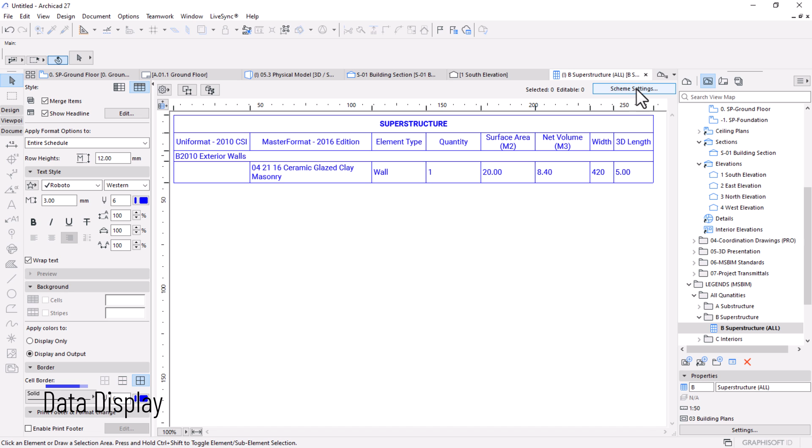We can also indicate some categories here to capture very specific information about our wall. For example, we can expose all these schemes. Let's go to scheme settings and add a field for skin. Do you have skin?

Skin insulation, skin thickness. I don't think we can say we want the composite - yes, this one. Let's add also this composite structure and see what information it gives. I will drag it right here under element type.

Yes, you see now we have a bunch of information that comes from our composite, and there are tons of information we can extract even from the wall section. In the wall section we can find - we don't have skin parameters here.

Yes, we can also find all the surfaces that have been used. So if you say outside surface, let's see how it will behave. Yes, outside surface gives us that material, which is good. And let's see if we put another - we have outside, let's say inside.

Yes, we can also extract information if the wall has a number of doors or windows. Yeah, that's really amazing. So I'm just going to put it there. Then let's see what is there. Yeah, the outside and the inside, which is great.